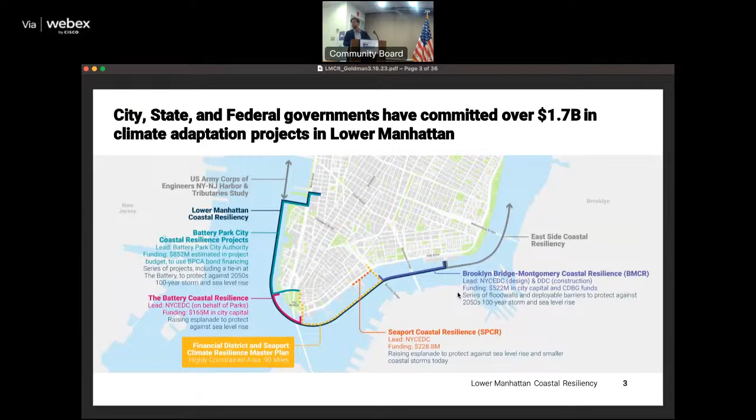So I think this slide is helpful to give a sense of, beyond lines on a page, truly what these projects are starting to look like. The top image there is our interim flood protection measures.

This is a program that we work with emergency management on. We heard from the community: great, you're doing long-term planning, but what are you doing to make us safer now? And this has been deployed in the seaport and areas of two bridges, ways to really buy down risk, not necessarily protecting against a giant Hurricane Sandy-type storm, but more frequent coastal storms that we expect to see in the near future.

Also, we can keep on this slide for one more moment. We also have asset level protection, so a lot of our buildings have done critical work. Here, the image shows some of the work at the Hugh L. Carey Tunnel, protecting that gate. We also have a series of the BMCR project we'll be getting into, the battery project, and as I mentioned before, this long-term effort that we're doing in FiDi-Seaport.

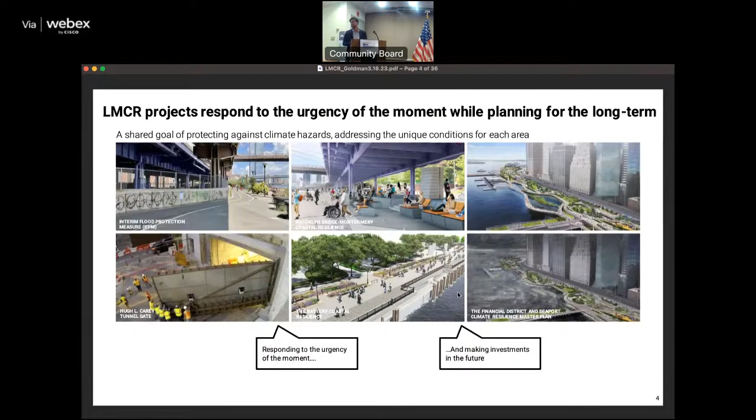And so, once again, I mentioned this at the top, but to give you a sense of where we are with each of these projects: the BMCR project, the one at the top, broke ground in the fall and construction has started. South Battery Park City following quickly behind, as well as the Battery Coastal Resilience. So I would put those three projects in that first category of construction.

Then you have the next two projects, the Northwest Battery Park City Resilience and Seaport Coastal Resilience, that are in design. There have been a number of recent community meetings and upcoming meetings for Seaport Coastal Resilience, and then that long-term effort for the FiDi-Seaport Master Plan.

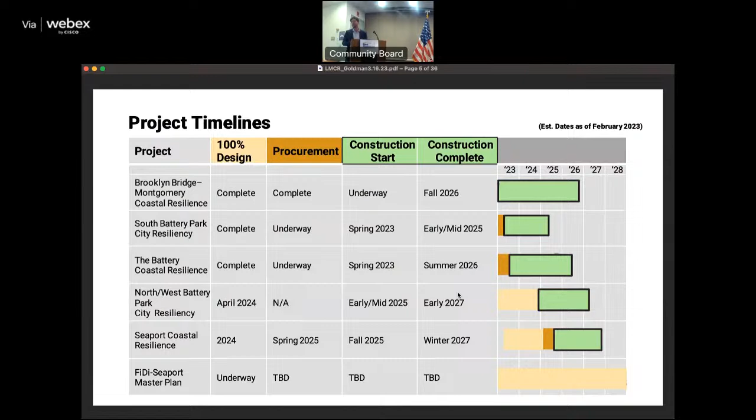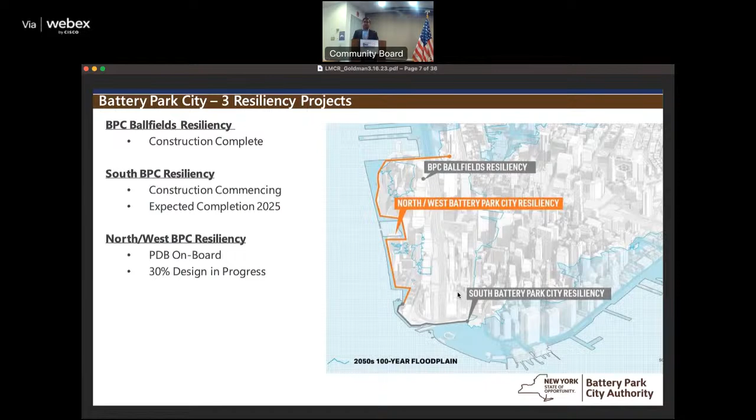That project is currently under design. We are working with our consultant team on the 30% design and fully engaged with a number of community engagement meetings and events that are happening.

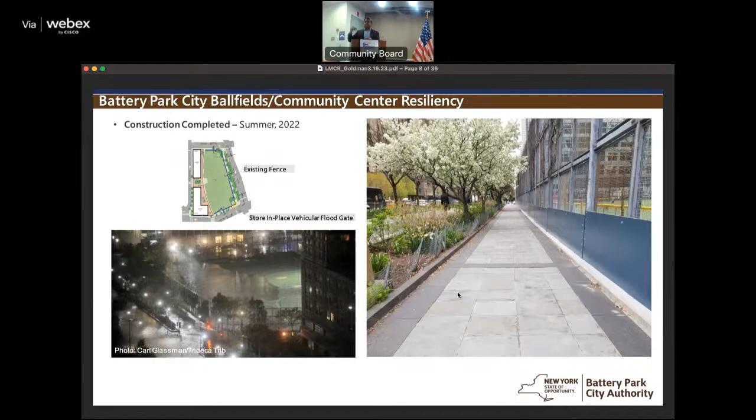Quickly on the Ball Fields Resiliency Project - this is something we completed last summer. The picture on the left is from Sandy and what happened there. It's a low-lying area, it was flooded. What we recently completed is the foundation underneath this fence wall, and then the lower piece with the painted metal wall you're seeing. All that is there to protect the ball fields until the south and north projects are completely done.

So the South Resiliency Project, to be able to see that, I wanted to go over the overall timeline. Okay, there we go. This is the active one. I know, but I can't read. I got you.

We engaged a design consultant early on in 2021. The design was completed December 2021. The EIS was done in October 2022 last year. And we have started construction right about now. We expect to complete in 2025, as I mentioned before.

This project is sub-broken into phase 1, which is the upper side of the project - Wagner Park and the area around the Museum of Jewish Heritage - and phase 2, the southern part around Pier A Plaza and a portion of the Battery. Phase 1 construction has started. Phase 2, we're in the final stages of procurement for a contractor, and we expect to start construction this summer, again ending around 2025.

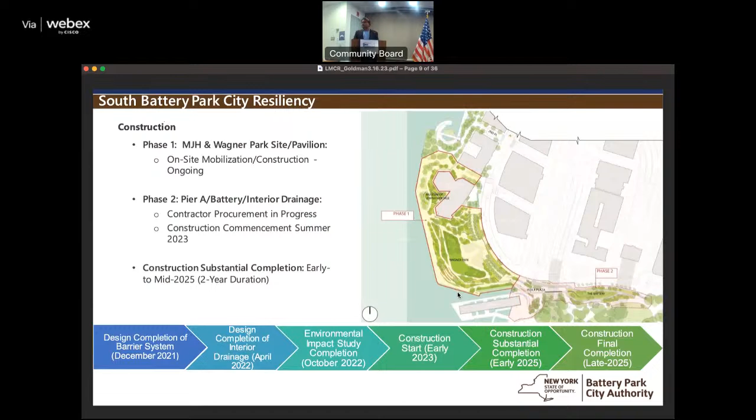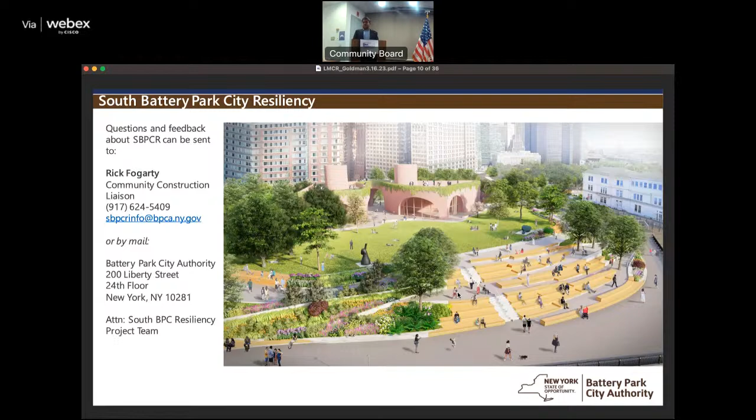As far as community engagement goes during construction for the South Battery Park City Resiliency Project, we do have an assigned person for that. This information is also available on our website, so if there's any information you need, you can go to our website or reach out to us or the contact on the screen.

For the North Resiliency Project, we took a slightly different route in the methodology for design and construction. Instead of the traditional path of design first and then procurement for a contractor, we went with progressive design build, which makes the process more efficient, smoother, and faster. This means we've gotten a team on board that includes the construction consultant as well as the design consultant, working together to move through the process much quicker and faster. The PDB team was brought on board last summer.

We've been working through design through a number of community engagement meetings. We expect to complete the EIS in 2024, start construction in 2025, and reach substantial completion by 2027.

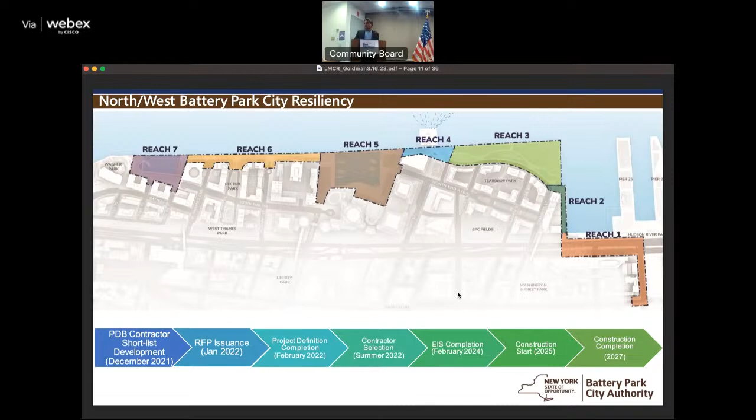So just in terms of community engagement, there have been a number of community meetings last year, including workshops where we walked through the site with community members. One interesting thing we did was paint some lampposts along the Esplanade in Battery Park City bright blue. The top of that blue line shows where we expect the water to be in the 2050s for a 100-year storm, which really gives you a sense of what we're dealing with here.

Starting this year, last February, we've had 4 workshops with the community, using a very different format. Instead of just presenting what we were doing, we sat down at tables and engaged with the community directly. We took all the feedback and timed it so we could incorporate it into our 30% design, which we'll complete roughly late spring or early summer. That's when we'll have our next public meeting to present the 30% design. I think that's all I have.

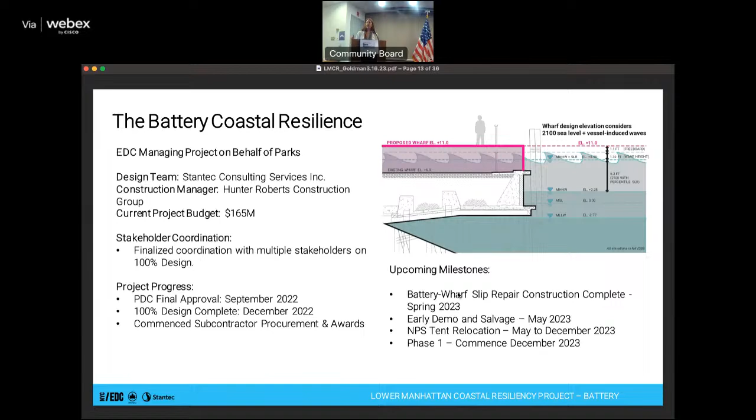So where you currently step down to the wharf from the park, you will step up to elevation 11. There's a bunch of lines here showing all the different elevations—essentially all the factors of safety built into the project get you up to elevation 11. The wharf is currently at elevation 6, for reference elevation 6, and so this raises the wharf by 5 feet.

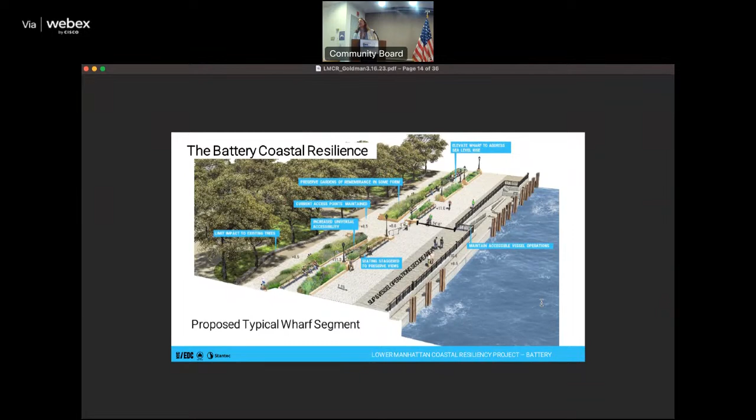Oops. Okay, you all can see it.

This is a perspective view of what the wharf will look like after construction. Just a few key things that I wanted to call out.

You will walk up to the wharf instead of walking down to it as you do now. We've really tried to make sure we have a universal design approach to the whole project, maintaining and actually increasing the number of ramps and sloped paths—sloped paths is probably a better term since ramp has a specific technical terminology. So we're really trying to have as many sloped paths coupled with staircases throughout the project.

You can see we're maintaining and rebuilding the gardens of remembrance that were built after September 11th. And then you see the interesting step-down feature at the wharf.

That is also a resilience feature to try to build the wharf as flexibly as possible so it can be used throughout the useful life of the new construction, but also used by a flexible variety of different vessels. We don't know what vessels will be out there in the future, or at different tides now versus different tides in 2080 or whatever we see in the future. So that's really the Battery project.

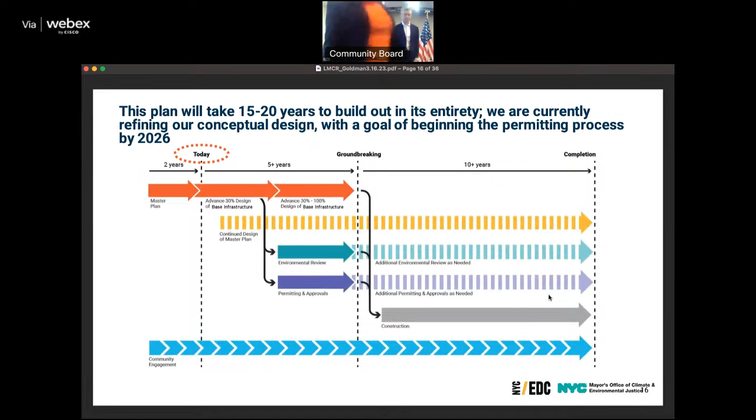As we digest this for a couple seconds, and with the aforementioned 8-second delay, I'm going to talk about the Seaport Coastal Resiliency Project, SPCR. This is in the same region as the master plan. It's seen as a down payment essentially in the same area, while the master planning process will take quite an extended amount of time.

This is a particularly low-lying area where we need to act quicker, because by the 2050s it'll see periodic flooding. The Seaport Coastal Resilience project creates a more resilient seaport, addresses sea level rise, drainage risks, and improves waterfront access. Raising the shoreline 3 to 5 feet will provide sea level rise protection until 2100 and storm surge protection for the 2050s.

As part of the federal grant application process, we applied for BRIC funding. Early project scoping also includes esplanade improvements, ecological enhancements, and green infrastructure to address stormwater management. Green infrastructure is something we're definitely going to focus on during this process. This is still in one of the earlier stages. We're working on the RFP internally, and the design will be developed once we move further along and have a consultant on board.

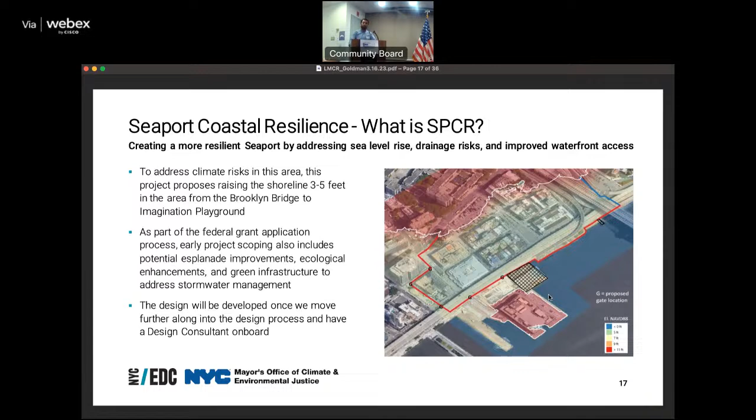Because we're still in the early process, we're still developing the RFP. Our next step is to continue coordinating closely with the community. For funding goals, we have 170 million of city capital.

We have 50 million from FEMA through our BRIC grant. This is the highest amount that's actually allowable, so that was a large win for us. And then 8.8 million from the Howard Hughes Corporation to go towards the waterfront esplanade and public improvements.

Next steps: the BRIC award process is ongoing from FEMA. We have a notice of award, but we're still waiting on the formal paperwork confirming we're awarded, which should be coming imminently. The beginning procurement of the design team is also imminent as we're developing the RFP. To reiterate, once we have a designer on board, we'll regularly coordinate with the community and stakeholders and share updates through meetings and quarterly updates with CB1. Thank you all.

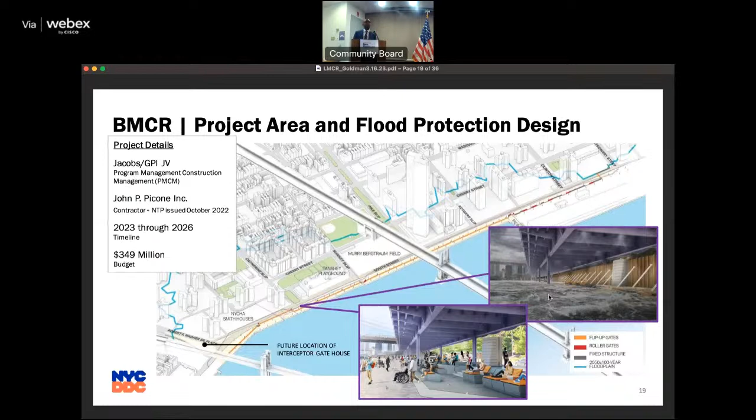That was the code, I got you. Oh, there is a delay. Okay, that's the delay, I'll watch that one.

Okay, so now we're going to talk about the East Side Coastal Resiliency Project, ESCR. I'll mention this is DDC's pride and joy, and just because I'm on it, so perhaps these are just my words, but we've spent a lot of time working hard on this project. Right now we are in construction.

I guess the first thing I'll mention is that the way ESCR provides flood protection is a little different from BMCR. With ESCR, we have the ability to provide flood protection via an array of swing gates. We have roller gates, we also have gates that are above ground. We have flood walls that are below ground, so that in the event there's any stormwater coming in, we have that protection below ground as well.

We have sewer, combined sewer overflow or CSO expansion, so again we can handle the stormwater. And we have so many things. One of the biggest things we're doing is we're actually raising the entire East River Park by 8 to 9 feet. So all those together really are a very comprehensive way for us to protect our waterfront.

While we're doing this very critical flood protection work, we also see this as a great opportunity to improve the waterfront. We're providing new amenities, we're taking every opportunity to improve the drainage, and we're also bringing in new trees and new planting material that can withstand storms and seawater.

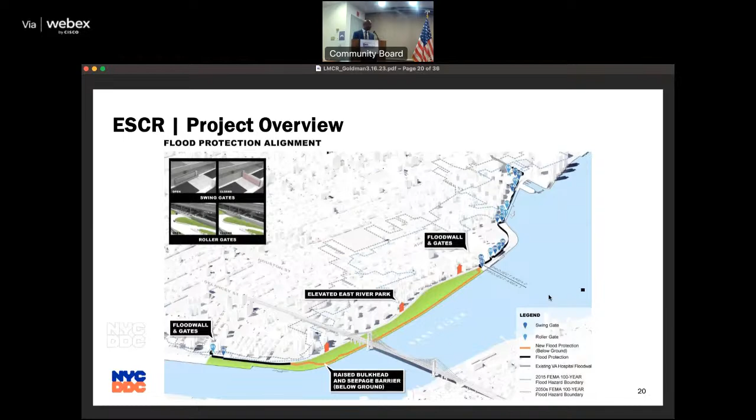So for ESCR, it's important to note that we have broken it into three separate areas. So let's say if BMCR went from the Brooklyn Bridge all the way to Montgomery Street, the ESCR begins at Montgomery Street and extends all the way up to East 25th Street. So now we're talking about protecting not just the East River Park, but also the districts of CB3 and CB6.

Staying on this slide, we've broken up the area into three specific areas. Project area 1 starts all the way from Montgomery Street to East 14th. Then we have project area 2 that goes from East 14th all the way up to East 25th Street. And then we have PC, or parallel conveyance - I'm sure you guys have heard about that. We have parallel conveyance, which is essentially within those borders, located at various locations where we do that sewer upgrade work.

Focusing on construction and the construction schedule for project area 1, it's important to note that project area 1 is divided into two areas. First, we have the lower end, or the southern end, which we're calling phase 1, supposed to be done by roughly 2024. Then we'll transition to phase 2, which will bring us to a 2026 completion.

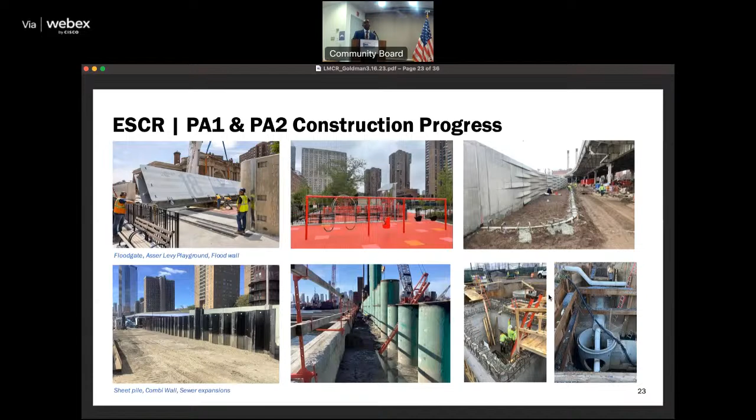So that was mine. Okay. Right, and I'm so glad, Congressman, that you had mentioned the importance of community engagement.

I'll mention that DDC has a very robust community engagement team. In fact, right now there's also a CB6 meeting, so we've actually had to split our team in half, and they pulled me from the field to help out, so it's my pleasure to help out. But with community engagement, we take it very, very seriously.

In addition to communicating with the community, we make it our responsibility to also educate the community. One of the things we've been doing is reaching out to local schools, meeting with them, giving them mini lessons about what this project does, this project that's in their backyard, and giving them a real understanding of what the construction process is.

I'll also mention that in our community engagements, we've reached out and launched a call for art where we were able to involve full participation from our students so that we can have their participation as part of the project.

And I'll end by saying these coastal resiliency efforts are very important to us. At DDC, we are absolutely proud to do this work. I'm absolutely proud to be on the field to do this work. So thank you so much.

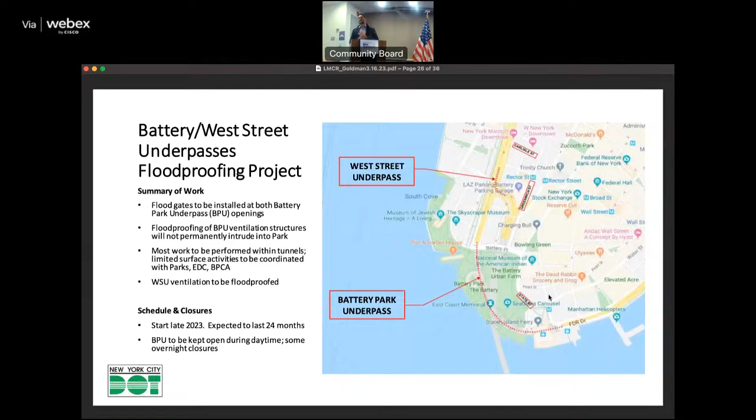For the West Street Underpass, the flood protection work is expected to start late 2023, and it's expected to be a 2-year project. The Battery Park Underpass will be kept open during the daytime, closed at night.

The next project I want to talk about briefly is the Whitehall Terminal Flood Protection Project. The ferry system both in Lower Manhattan and on Staten Island suffered a lot during Sandy, so there are projects in both boroughs to protect the facilities we have. Here the flood mitigation is both structural and protecting electrical equipment, computerized systems, and mechanical systems. There are a lot of different components to the flood protection, what we call wet and dry flood protection, meaning some of it will be designed to flood.

That has FTA and city funding, and there's a design build RFP that's targeted for spring 2023. Thank you, and happy to answer questions.

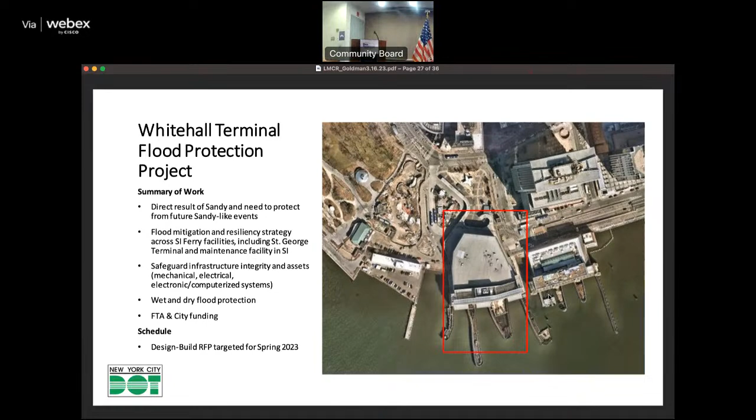So I know we have one final slide just on upcoming engagement. It sounds like we want to move to the Army Corps folks, but I wanted to briefly mention a few of these projects. As I mentioned, there's ongoing construction, and we will keep coming to the community board with updates as it moves into a different phase. For Battery Park City, that south project will be heading into construction shortly, and northwest Battery Park City - many of you have been attending their Reach by Reach workshops, the last one being North Cove last night - will have an upcoming meeting when they hit 30% design later this spring.

Seaport Coastal Resilience and the Seaport Master Plan will both be entering phases with a lot of engagement. There's an RFP coming up for Seaport Coastal Resilience, and for the Seaport Master Plan we'll be doing a series of workshops on specific area issues. We had one on maritime earlier this week, and we will have a variety of others.

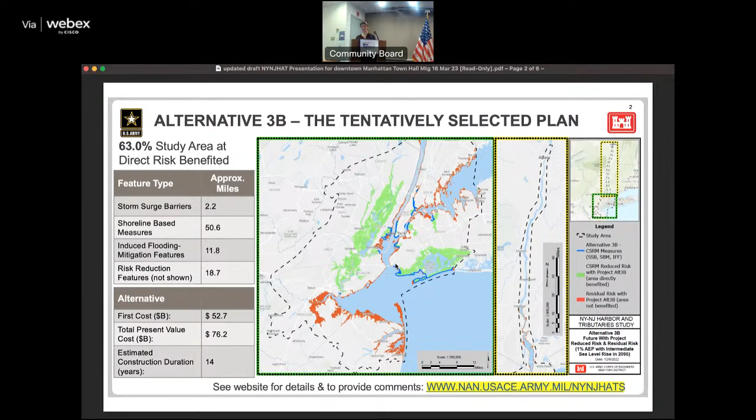Now, we are still in a very preliminary and conceptual stage. We are in the feasibility phase. We're still accepting comments. The earliest, if everything goes perfectly smoothly, the earliest construction would start is 2030. Next slide, please.

We do understand that there is a lot of complexity in the area, a lot of flood risk, both from coastal storm surge and from interior stormwater, rain, and interior drainage issues. The analysis we did does incorporate interior drainage structures and pump stations to reduce the risk of interior drainage flooding. But we do need to take a deeper dive into that.

And we do understand, as presented today, that there are a ton of really great plans and concepts ongoing in the area or in the process of being built or in design. So we do need to reconcile our study with those. But again, we're at a very preliminary stage and we are happy to do so.

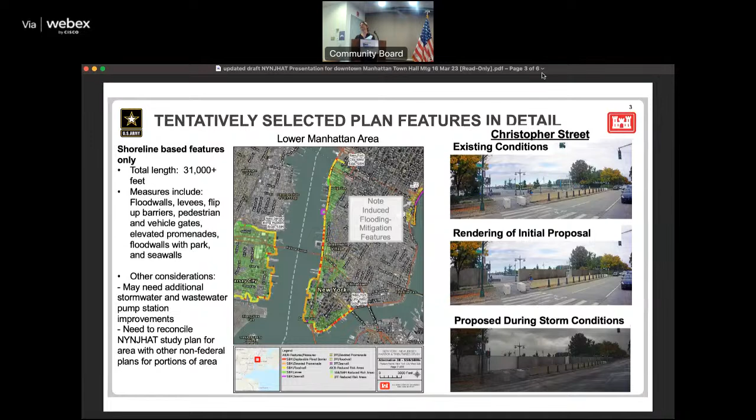All right, the schedule. So we did start the study in 2016. We were paused for a little bit due to lack of federal funding, but we have resumed, and the public comment period is currently ongoing for the draft integrated feasibility report and Tier 1 environmental impact statement. Please get your comments in by March 31st.

If things go super smoothly, we aim to have the end of the study in 2024. That may very likely get extended, yet to be determined. We'll reevaluate once we get all the comments from all the agencies at the end of the month. I do want to note that this is just the end of the study phase. After the study phase, we need to get congressional authorization and appropriations to move forward into design. So there's still a lot of room for comments and improvements.

Next slide, please. So we do have two more virtual engagement sessions that we are having next week. We have one on Tuesday, March 21st. Here is the WebEx, Mr. Bryce Weismiller's WebEx - he is our project manager for this study. So the 21st, Tuesday at 1 p.m., and then the 22nd, Wednesday at 6 p.m. So an afternoon and an evening session.